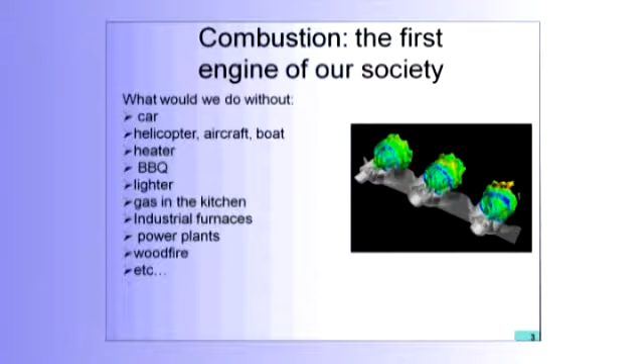So it's really the first engine in our society. If you would suppress combustion, there's a small list of things you would have to live without, and you can see it would be very difficult to live. Actually, the whole society would collapse if combustion would stop tomorrow.

Just a few examples. All of you know about satellites, but a satellite is basically first a combustion fact. It's this kind of thing you need to propel satellites up to the place where you need them. Combustion is also not only useful for society, it's also a lot of fun. This is the simplest example of where you can have fun if you are an engineer.

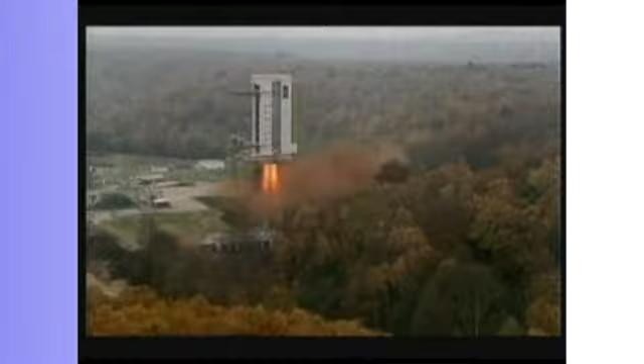These pictures give you an idea of the power which you can find in an engine like this. By the way, those are French engines.

Everywhere here, you find combustion. The rule for such an engine is simple: it has the power of a nuclear power plant in the volume of a car engine. Of course, it doesn't last very long, usually 200 seconds, and that's the end of the story. But still, this is the kind of funny thing you can do when you work on combustion.

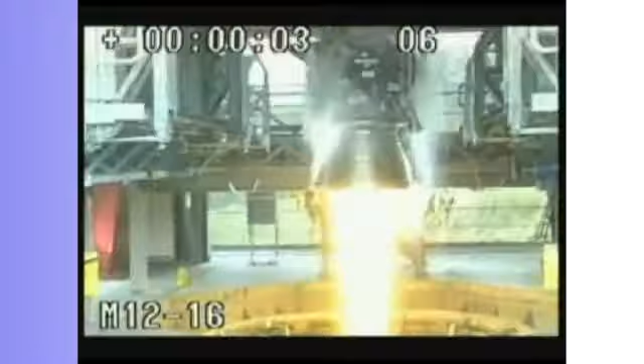Now, combustion, here are other pictures. Those are normal operations, and you can see how important it is to master the process which leads to this kind of power. Sometimes these things get out of control. You will see a picture in a few seconds where things don't burn the way they should.

So now, this is normal, okay? You're going to see something which is not normal in a few seconds. And this one, for example, now this is not what should happen. This explains why everyone is sitting about 200 meters away from the rocket when you start it.

Now, I'm not going to spend a lot of time in this course on military applications, but obviously military, army, everything there is about combustion. Rockets, missiles, bombs, everything here would not exist without combustion. That would be a good thing, but you don't have a choice.

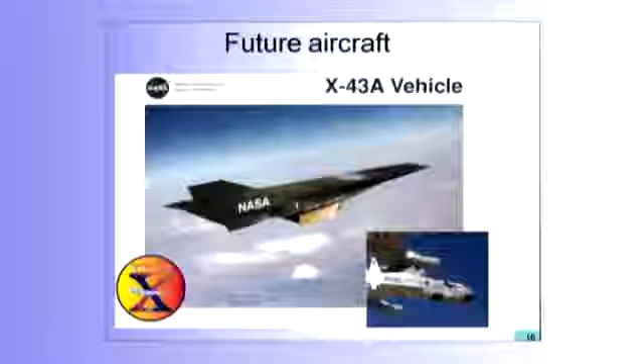So the aircraft of today, the aircraft of tomorrow, and even the famous problem of terrorism you hear about every day now - it's not that it's difficult to make a bomb, but what is difficult is to send it where you want it to go. And that's much more difficult, and again, it's a combustion problem.

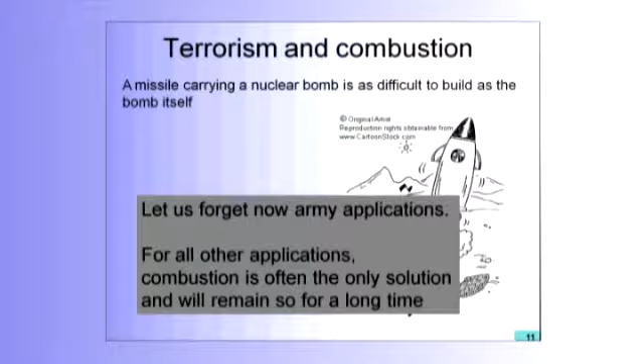So I will forget now about army applications, and come back to your everyday life. I want you to remember two basic equations in this field. The first equation is the following one. There will be equations in this course - today there will be only simple equations, but after that you will see many more.

But the simplest one is that the energy on Earth today is combustion, and I think most of you realize that. What you don't realize is that the energy on Earth tomorrow will also be combustion. It is clear that renewable energies - you hear about wind and sun every day - will replace combustion, but that will take a very, very long time. You will probably be retired by the time this happens. And also, they will not be able to replace combustion for everything.

You cannot propel an aircraft with sun or wind. This will never happen, whatever you do. So for a long, long time, combustion will remain the first energy source, whatever we do.

Just to give you an example, this is the way they produce electricity in the United States today. If you look at natural gas plus coal, it's more than half of the energy obtained by burning something, and renewable energies here are very small, about 4% or something like this. In France, it's a little bit more, more like 10%. So these things will increase, and they will increase fast.

The market for renewable energies grows extremely fast. The problem is that it's very small today, and the global demand for energy grows faster, which means that in the future, not only will renewable energy grow, but combustion will grow too. We'll build more and more power plants using combustion as an energy source. For example, the market for gas turbines keeps growing all the time.

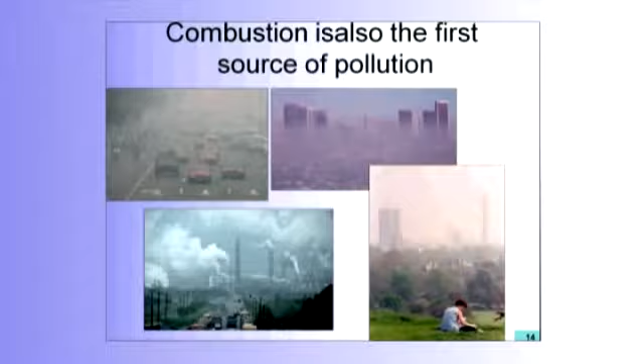Pollution, you heard about that before. This is something we've been working on for a long time in the combustion community, and we cannot live with that. If we keep increasing combustion without limiting pollution, we'll be in bad shape.

An interesting question was, does this change climate? To test that, it's very difficult, and one experiment you'd have to do is stop aircraft for a long time. Of course, you cannot do that except in certain circumstances. For example, after September 11, there was no aircraft in the United States for 3 days, and during these 3 days, they observed - this could be due to random fluctuation, but still - a much larger difference in temperatures between day and night.

So this is a suggestion that when you put all these aircraft in the sky, you modify the clouds, and so you modify the climate.

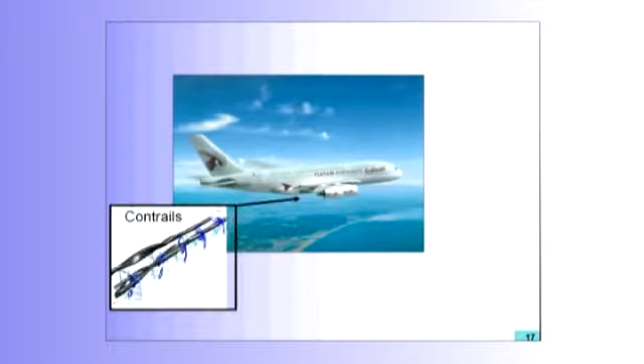So you see, combustion science goes from outside the engine, and also, of course, I'm going to talk a lot about inside the engines, and this is what we need to master. This is what I'm going to try to teach here.

So, pollutants. There are two main types of pollutants. In this course, we're going to burn a lot of hydrocarbons - molecules where you find N carbon and M hydrogen atoms. You burn them with oxygen, and it gives you CO2, water, and a few other things.

These other things are the things that can be avoided. CxHy is a hydrocarbon which you did not burn completely. This is the kind of thing you smell at an airport, for example, kerosene. CO, NO, all these things are due to combustion which is not perfect.

And so those can be avoided, and they should be avoided. CO, for example, would just kill you. If you have too much CO in a room, you're going to die in a short time. So, of course, you must avoid it.

The progress here has been impressive in the last 30 years. 10 years ago, the objective was to diminish those things. Now the objective is different - we also want to diminish CO2 and H2O.

CO2 and H2O - if you burn a hydrocarbon molecule, you will necessarily get N molecules of CO2. You cannot avoid that. So the only way to decrease emissions of CO2 and water now is to maximize efficiency. That means we need to build engines which consume as little hydrocarbon as possible if we want to minimize the impact on climate, because CO2, of course, is the main problem for climate. The progress in the combustion field has been huge in the last 20 years - in the field of piston engines, for example, efficiency has increased by a factor of 2.

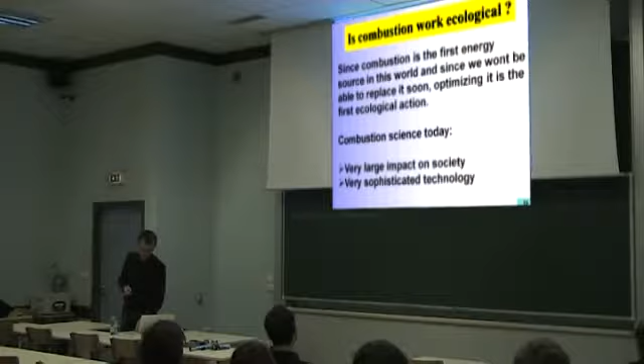Now, I see a lot of people, especially young people like you, wondering if I'm doing combustion work, am I doing something dirty? Actually, it's just the opposite. Today, if you want to do something useful for the planet, you need to work on combustion, because combustion will be here for a long, long time. There's just no way to avoid it.

Well, there is one way to avoid it. You can stop driving, you can stop flying, you can stop heating your house, and you can stop eating also. You can stop a lot of things. If you do that, you don't need combustion. If you want to continue living like you do, there's just no way.

So we need to work on combustion because it has a very strong impact on society, and also because today it's a very sophisticated technology, so we need a lot of engineers. This is why you are here.

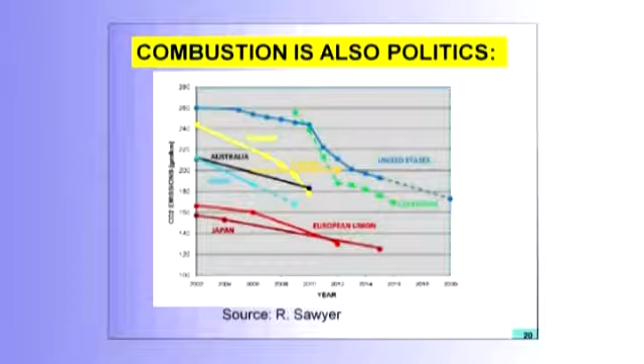Now, combustion is also politics. This is an example here of the years and the regulations giving you the amount of CO2 per kilometer in a typical car. You see that, for example, Japan and European Union are pretty low. You can see that every time you buy a car in France, for example, that you are looking at these numbers and you get taxed if you do something which burns too much fuel. But here you can see, for example, in the United States, that the ratio is almost 2.

So it's not a problem of technology here. It's a problem of politics. You have to decide you want to drive a small car or you want to drive a big car. So you see also where it's not only science - there's also an impact on the politics, which is very strong.

I'm going to say some words, because this is something you hear about on TV almost every day at the moment, about the link between what we burn and the change of climate. This comes from a very good talk given by Professor Sawyer two years ago. Sawyer was basically addressing the question of the link between combustion science, what we do, and climate.

Just to remind you of a few facts, the idea that combustion would change the climate is not new. Fourier, already two centuries ago, said that this was possible, and Arrhenius - you will see Arrhenius many times in the field of combustion - did a very simple computation. He suggested that if you double the CO2, you change the radiation balance between the Earth and the sky, and then you can raise the temperature of the Earth by 5 degrees.

Now, you can do that on one page. If you want to be more precise and take into account the ice, the atmosphere, the ocean, you take about 2,000, 3,000, 4,000 people on Earth. It's called GIEC here, and those are all people building models to predict climate. But the conclusion is always the same: if you release CO2, you increase the temperature of the Earth.

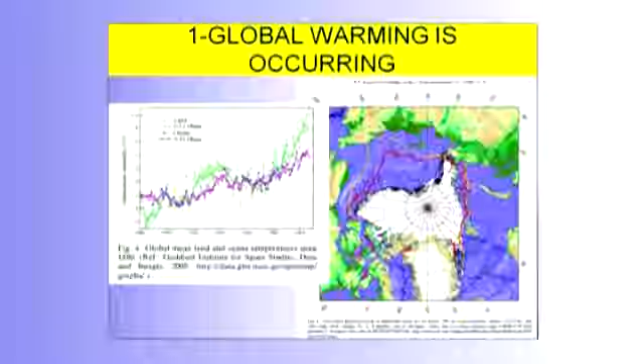And of course, you know that as the temperature of the Earth is going up, the place, for example, where you find ice on the pole is shrinking, and the amount of ice which is left on the pole is going down, and you hear about this problem every day on TV.

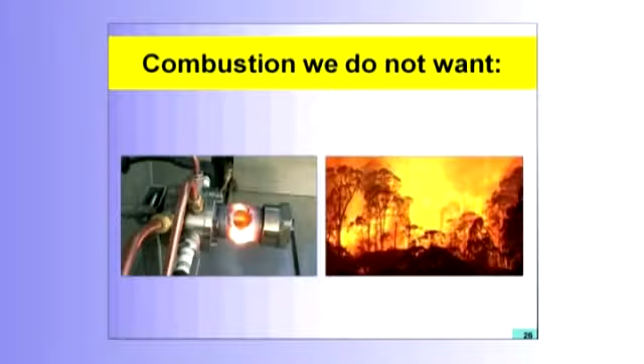Now, combustion has other problems. Even if you don't want to do combustion, you're going to have to fight combustion in many places. If your engine has a problem, here you see a nice hole in a combustor. And also, if you have fires, you have to fight combustion. You need to understand how these things propagate, for example. There's a long list of places where you get into problems with combustion.

This is basically the world of combustion split in two parts: people like me who are trying to get good combustion, and the other people who try to have no combustion. All the people working in that field try to avoid combustion. But of course, you know, it's just not possible.

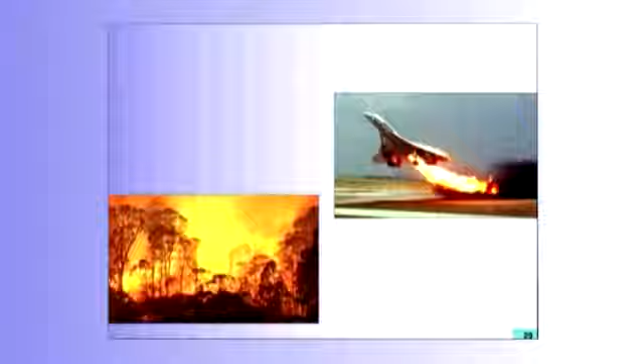For example, if you're flying in this aircraft, suddenly you are very interested in combustion science. You'd like to know what's going on. The French had this rather dramatic problem with combustion, and this is a typical case where combustion science could have helped if it had been included in the design of the aircraft.

An example also of electrical safety, something which is not as well known. If you take a building, or even your house, and you have a gas leak, you can have gas mixed with air, so this can explode. Usually, why does it explode? Well, it explodes because you get an electrical spark somewhere.

For example, in the place where you have all your electrical connections, you have what we call an electrical box. The problem is to design this box so that if there is a gas mixture and you ignite it because of a spark, the flame will stay within the box and will not ignite the whole building. There are lots of people working on that.

So you have many solutions. One is to design a box that is really able to keep the flame inside. If you do that, the box might have a structural problem, because it could explode as the pressure goes up. So what you do is put a small hole so the flame can go out. But only a very limited amount of flame should escape, because if a large flame comes out, you will ignite the whole building and it's lost.

The other solution is to have a box where nothing can come out. Then the flame will start, it will build up, and the problem quite often is that the pressure will rise to a large value and the box itself will explode. So it's a design problem to be in between these two situations, to make sure that if you switch the light on and there's gas, nothing explodes.

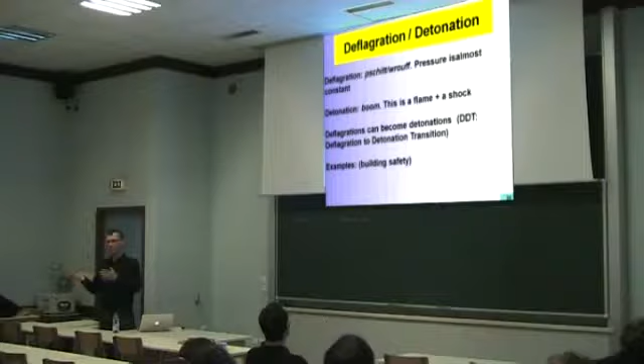The pressure in a flame like this is almost constant—the pressure in the burnt gases and the fresh gases is the same. A detonation is a boom. A detonation is basically a flame plus a shock wave. You've heard about shock waves in the course on aerodynamics. Here, you get a shock plus a flame pushing the shock.

And of course, not very pleasantly, deflagrations can become detonations. I will now show you a few examples that should be simpler to understand.

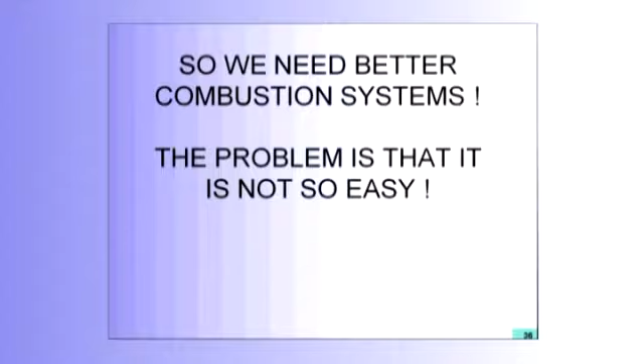You had an example not long ago in the oil industry. You remember, as soon as you get an explosion in a system like this, you get into a lot of problems. So we need better combustion systems, more reliable, more efficient. The problem is that's not so easy to do. First thing is that combustion technology today is already very complicated.

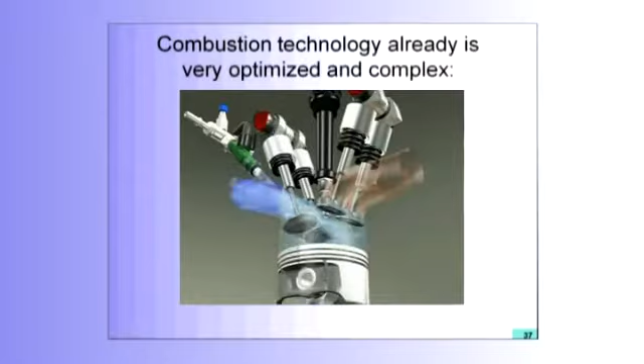I'm just going to show you a few examples here. That's a piston engine, 4-stroke. You get the piston, you get valves here for intake and exhaust. I have brought actually 2 of them, so you can take a look at them. In the old days, all the students were able to work on their own engines. I know today very few of you have ever seen that. So that's a piston, an example of piston engines. I broke them myself.

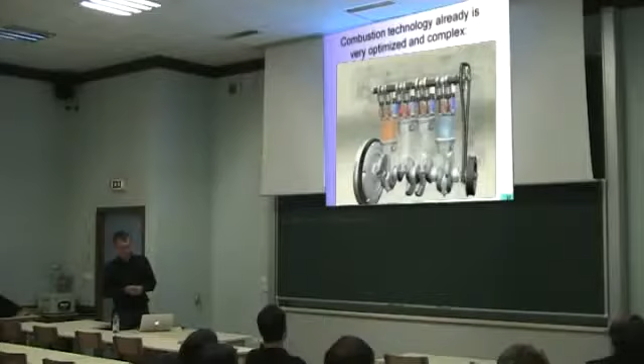So the technology here is extremely complicated. If you start working on a piston engine and you want to improve it, you will find out that many people have worked on that before you, and that's not so easy to do better. Just to give you an idea also of the complexity, this is a 4-cylinder system where you can see the velocity field at the intake and at the exhaust, and you can have an idea of how complicated it is to tune something like this. This used to be like an art, now today it has to become a science to be able to get all the waves. You get a lot of acoustic waves propagating everywhere. So this is a very complicated field. If you have an engine and you want to do better than what is existing, you need to do something really good.

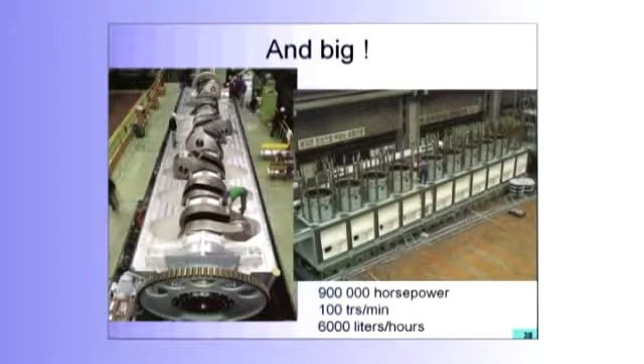Now the problem, of course, also is that even if you are able today to build a better engine, the cost of replacing the existing technology with another technology is very, very large. If you think, for example, of engines like this guy here, this is an engine for a boat. You can see the size of it. With this kind of engine, if you come out with an idea and say I can do better, well, the cost of replacing this engine by another one will be a very large cost.

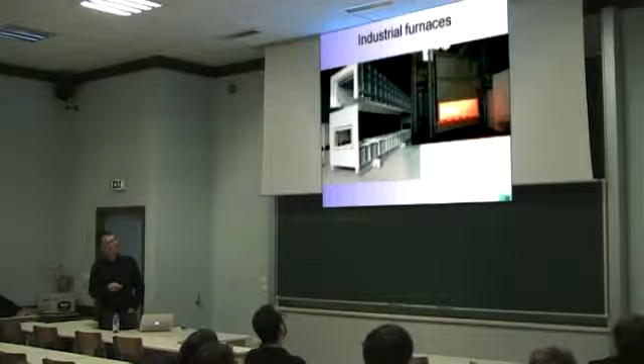Furnaces, you know, we need to heat a lot of things for process, and of course we do that with combustion, with flames, very long flames here. You can have flames 10 meters long, 20 meters long, and optimizing this is extremely difficult again, but the consumption of these things in terms of gas and in terms of pollution is huge. So again, here we have to do something to help.

Gas turbines. Okay, I'm going to talk a lot about gas turbines today because they are very important. Gas turbines, there's just no other way to propel, for example, an aircraft. You cannot use any kind of other energies to do that. So it's very important, and it's also very important for electricity.

Electricity today is produced by many ways, but typically when you talk about renewable energies like wind or sun, there are problems with these systems. There are days where there is no wind or no sun. So what do you do when you install a system producing energy with wind or sun? You need to buy also a gas turbine, because the customers want electricity even if there is no sun or no wind. Especially in summer, which is becoming the first problem quite often, because people use air conditioning. On a very hot day without wind, you will have to be able to do something, and so you will need a gas turbine.

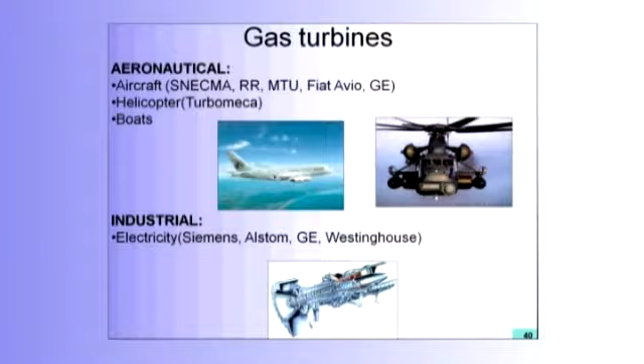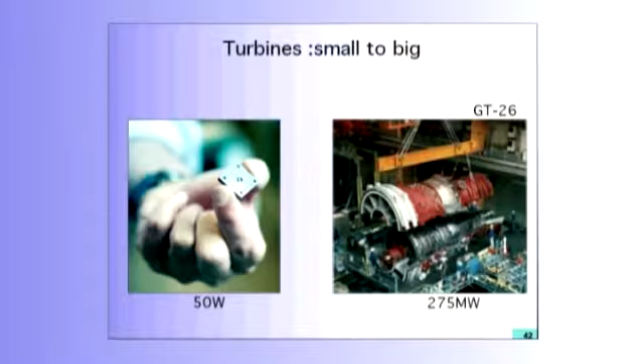Here you get a reasonably big gas turbine, with power of the order of 300 megawatts. If you put 3 of them, you get a nuclear power plant. So it's a very large, very powerful system. At the other end, you have a very small gas turbine, about 50 watts. In between, you get all the range, so you can cover almost everything in this world with a gas turbine.

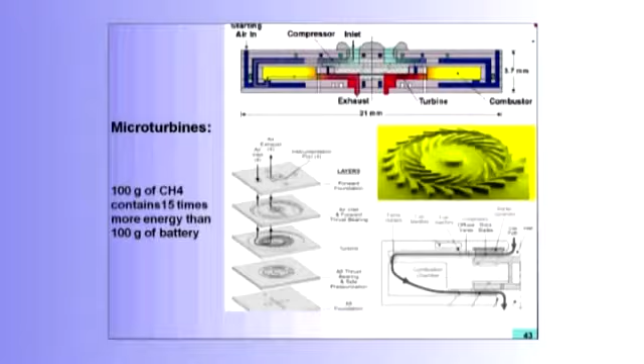Well, basically, and this is a very important statement here, if you burn 100 grams of methane, for example CH4, it will produce much more energy than what you can have with 100 grams of an electric battery, typically 15 times. The first wonder of combustion is that with a limited amount, a limited weight, you can have a huge amount of energy. So what is the application here?

Well, like always, like often, it's a military problem. You know that if you want to win a war, you need to be able to have the soldiers on the field for 3 days typically, 4 days, 3 days, well. For the man it's a problem because after 2 days most men like to sleep, but you can play games with that. You know, you can inject them a few things which make them work for an extended amount of time. After that they will die, but you don't care.

The problem is that if they work and they have no weapons, it won't work. What do they need for the weapons? They need electricity, for the GPS, for the radio, for the communication, for the weapon systems. And if they need to carry batteries on their back, it just won't do the job. They will have like a car battery on their back. So the weight is a problem. So the military here are paying to see if instead of giving them battery, they could just give them methane and burn that in a very small system which they could carry on their back, for example.

And this would be, as you've seen, big like this. If this works for the military, then it will work for you on your cell phones. Instead of having batteries, you will have things like this. And instead of having to plug your cell phone every 2 or 3 days, you could just go to the shop every 1 or 2 months just to add methane into your cell phone. So this is another field of application of combustion.

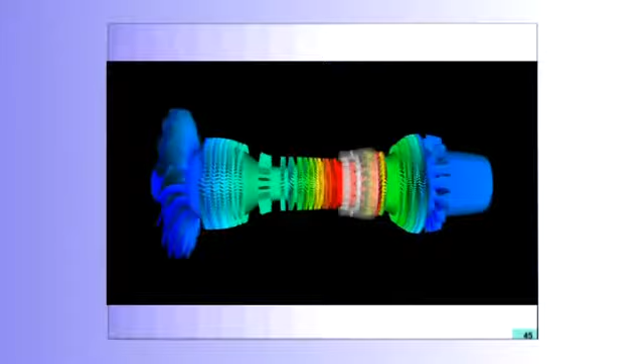An idea of how people are working today on computing those things. This is an example taken from Stanford where they compute a complete gas turbine with the compressor here, the combustion chamber, and the turbine here. The progress in the simulation field in the last 5 to 10 years has been so large that we start being able to do these computations. So you can see here a result of the computation.

To do that, you need a lot of processors. It's not something you do on your PC. You need a room filled with PCs, typically 10,000, 100,000, or soon 1 million processors working together to do this computation. Many of the students doing theses, for example in the field of combustion, will actually do computations very similar to this one.

These things here are called injectors or swirlers. I have brought one of them for you so you can take a look at it. A swirler is a system which is there to mix the air and the fuel. You will see in this course, basically combustion, to do combustion you need to mix these two things, the air and the fuel. It's like cooking, you know, if you don't mix those things it won't work. And you need to mix them fast. So this system, as you will see, is extremely complicated. The reason it's complicated is because you need to mix things very rapidly, and you need to avoid a lot of problems I will mention in a few minutes. So this is also an expensive piece of hardware. Don't break it.

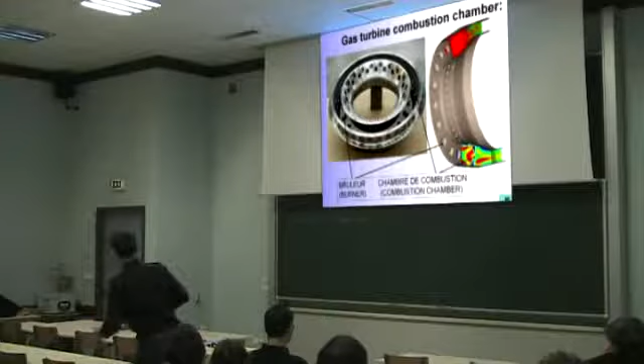So you have one here. In a system like this, you will have between 15 and 24 located everywhere here. The air will come from this side, mix with the kerosene here, and burn in the chamber here and go to the turbine.

Now, this thing you have in your hand, when it's burning, and you look at the flame here, this is what it would look like. It's like a lighter, except it's a much brighter flame. Here the gases are cold - this is cold air. And here you get very hot gases. Typically in combustion, you will go to 2,000 to 2,500 Kelvin. Those are the typical temperature range you will have in an engine.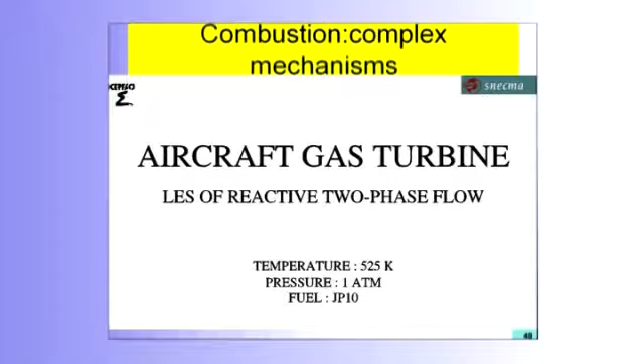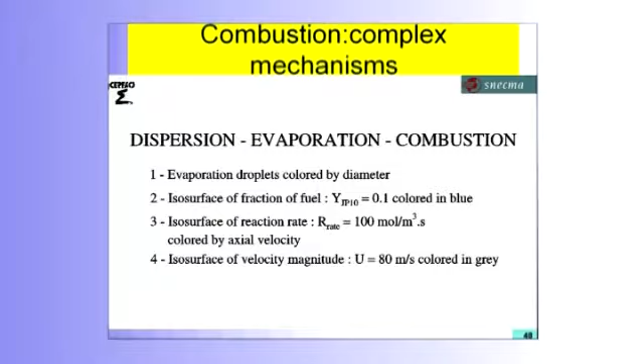So this is not the only thing you need to do in a gas turbine. The problem of gas turbine is that it's not only about doing combustion in this zone here - this is one sector of a gas turbine. You also need to make sure that the walls will survive. If you have a temperature of 2,000 K, there's no way the wall will survive if you don't cool them. So what you need to do is cool the walls here, and inject additional gas so that when the air reaches the turbine, it doesn't burn the turbine.

So you see here, for example, this is what we call dilution air, dilution jets. Those are cold air jets mixed with the burnt gases here so that when you reach the turbine, which is here, you will not burn the turbine. So let me explain that a little bit better.

By the way, I'm going to also give you this one. This is another piece of combustion chamber. This one comes from a helicopter - it's a Turbomeca combustion chamber. You can take a look at its shape. You will see the small holes on the walls, which are very important for cooling. And you recognize the shape, of course. It's only a piece which has been cut - normally you will have the complete chamber.

So for an engineer working in that field, the main question is the following one. I am injecting kerosene here, and here I'm injecting air, and here I have a turbine. The turbine will receive the hot gases directly, and if you don't cool the pieces which are here, you will just kill the turbine - it will just melt away. So it's really a problem of cooling these things.

By the way, I've also taken here a very small piece of turbine. It's what we call a vane. This is the kind of thing which will have to resist the temperature field. And you have an idea here of the size. And of course, it's a problem of what will be the temperature in this system.

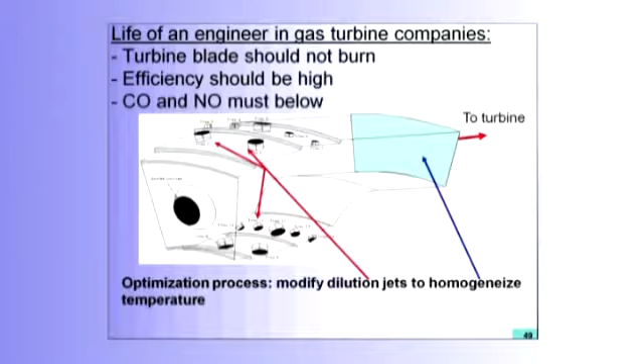So it's a problem of temperature - how do you cool that? Well, as I said, you're going to have to make sure when you add some cold air here that the temperature is low enough so that you don't burn the turbine. As I said, here you get 2500 Kelvin, here you're going to have 1500, and the turbine is just behind it. If you make a mistake, you burn the turbine right away - it's the end of the engine. And if you're flying in this engine, it's also a problem for you.

Now, this is a picture of a helicopter engine. Helicopter engines are quite complicated because they need to be small. So the air here is entering through that side, coming here. Here you mix it with kerosene, it burns. What you see here is the temperature field. The chamber makes a turn here, and here you don't see it really well - this is the first part of the high pressure stator. This is where the turbine is sitting.

So here, if you are sitting here, you receive all these hot gases, and the question is, how are you going to survive that? Well, it's not easy. This is the same thing you have in your hands, receiving all the hot gases here. It's a problem here to make sure that you get cool enough so that you can survive these hot gases arriving here.

When you talk about combustion science for gas turbines, our first problem is making sure you don't burn the combustion chamber. Of course, if you burn the combustion chamber, that's the end of the chamber, the end of the story. At the same time, we need to minimize pollution because you cannot sell your gas turbine. And we want to maximize efficiency and minimize fuel consumption. So the optimization of this system has been here for a long time.

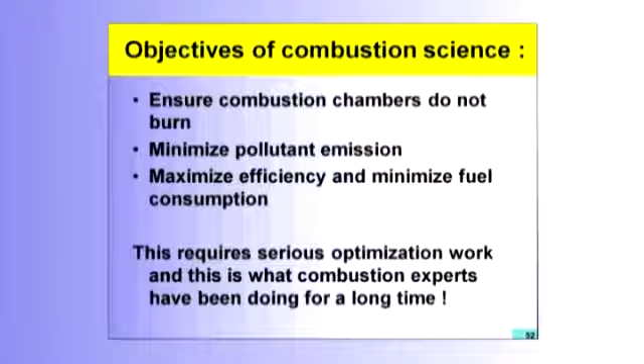It's very important to say that if you look at an aircraft today, or even at a car, they all look the same. The shape of an aircraft is not something you can really optimize much more—they all look the same because they all found the same optimum. But if you look at a combustion chamber, they are all different. Take a French chamber, a German chamber, an American chamber—all of them are completely different. This is a strong suggestion that no one has really found the optimum way to build a combustion chamber.

They are all different. So one of the reasons for the problems here is that when we optimize combustors, we don't always get what we expected. I must say quite often we run into problems.

This is an example, an old movie from NASA, taken at 2000 frames per second, so it goes much faster than what you see here. You have a mixture of air and gas, and here you have what we call a backward-facing step. And here you have combustion. You can see structures here. This is cold, and this is hot, typically 2000 Kelvin.

If you take a chamber like this and start optimizing it, you change things. One of the things you can change is, for example, the amount of fuel, or the amount of air, or the pressure, or the temperature. Quite often what you obtain is this kind of reaction—that means the flame doesn't do exactly what you expected.

In this case, instead of staying where the flame should be, it goes away, it goes upstream here, and we get what we call a flashback. That means the flame, instead of burning quietly here, oscillates.

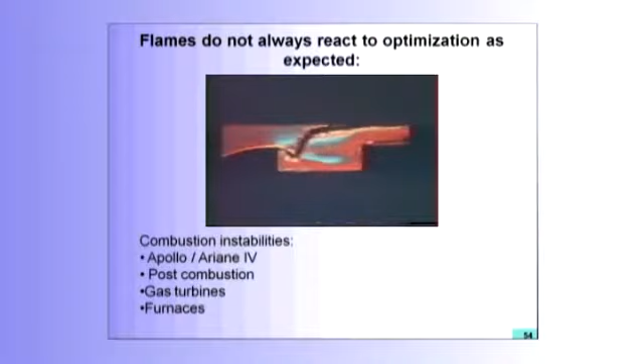This is another geometry, but you will see the result is the same—we have what we call a combustion instability. And very often when we optimize a flame, after a few tests, we get a system which is optimized but which gets unstable. And if it's unstable, you cannot use it. The examples of combustion instabilities are everywhere in the recent life of combustion, and they are a major problem for development of many combustion systems.

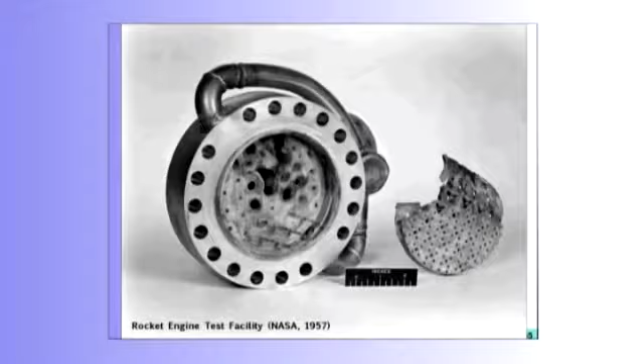If a flame is unstable, for example, if a flame goes to places where it shouldn't go, then the engine dies. This is an example from the famous rocket engine programs in the United States, the ones they used to go to the moon. You can see here, this is not the design—this is what happened after combustion instability. You can see the melted part of the chamber.

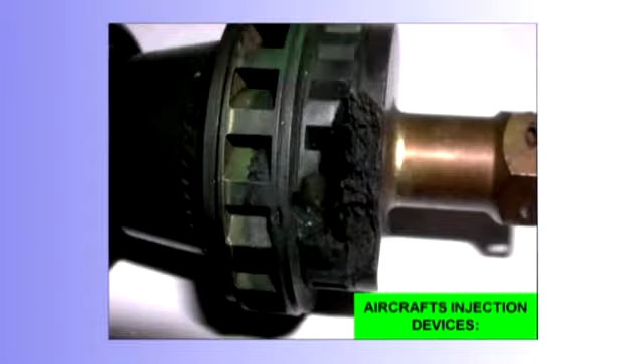Now, the other thing which is not good about this story is that even if you don't burn things, you vibrate the system. Combustion instabilities lead to oscillations of everything. When things start oscillating in a gas turbine, it's not good news. For example, in the compressor and the turbine, everything is adjusted in a very tight way. If things start vibrating, you can have a vane touching the casing, and then the whole engine will explode, and you will lose pieces, like this one here.

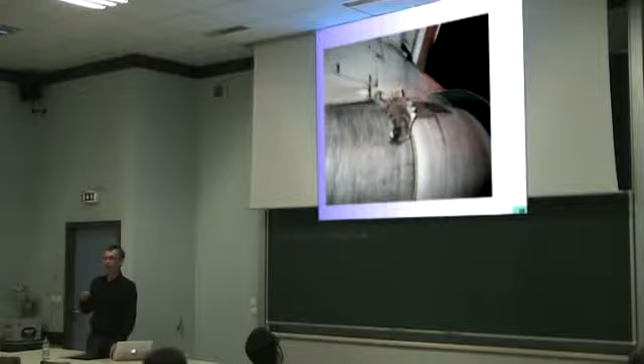This is a piece of an engine. This is the second engine in an aircraft which exploded, and this piece came through the aircraft and hit the other engine. So this is an example where the pilot lost one engine, and right away he lost the other one. How did it do that? Well, this piece of engine went through the plane and hit the other side. So that's no good, of course.

Now, vibrations are something you want to avoid. This is another example of bad vibrations. As soon as you get something which can create oscillations, you can go into problems. In this case, obviously, they have a problem of unsteadiness, something which is vibrating too much. And after a while, if things vibrate too much, you get into problems. I think the pilots were probably complaining about it.

Now, if you do that in a lab, and try to create the same problem in the laboratory, this is what you do. You take a combustor and add walls here so you can look at them. This is a picture taken at DLR in Germany. And if this flame starts getting unstable, this is what you observe.

Not good. Okay, when you start having these kind of problems, you have to work on it. The nice thing is that in the last few years, maybe 5 years now, we started being able to compute these things and predict them. Because up to a recent time, basically, we could not predict combustion instabilities. That means we would build the aircraft, build the helicopter, try it, and if it wasn't stable, then say, okay, how do we fix it? And you see that's a very significant risk for industry if at the last moment you can have a big problem like this one.

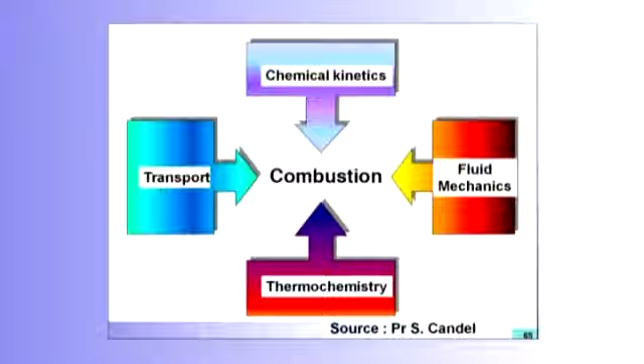So let's talk a little bit about science, because in the end this is going to be the topic of this course. Science of combustion is basically things you already know, not all of them, but many of them. It's a mixture of thermochemistry, thermodynamics, fluid mechanics, of course at ENSEEIHT you all know about this, transport, and chemical kinetics. I'm going to go through these four fields to show you what we're going to be doing in the next sessions.

Okay, thermochemistry. You've done that before, a long time ago. The simplest thermochemical equation is this one: you take, for example, methane, and add oxygen. Usually we get the oxygen in two ways. You can buy the oxygen, you go to Air Liquide, for example, and they're going to sell you pure oxygen, which is very expensive.

There's another place where you can find oxygen: it's just in the air, which is nice. For example, in this room you get oxygen. The problem is you get it also with other gases, mainly nitrogen. So the idea for air is that you get 1 mole of oxygen for 3.76 moles of nitrogen. This is what we're going to use throughout this course. So if you burn this, you're going to find CO2, H2O, and the nitrogen is just sitting here, it doesn't do anything. This is the simplest example of a thermochemical equation.

Now, hydrocarbons, there are many of them. The first one, the simplest one, there is no carbon actually, is hydrogen. Usually we burn it as a gas. Methane, CH4. Propane, C3H8. This is what you find. Methane is what you find in your house. Propane is what you find if you buy bottles. And then you go, of course, to gasoline, which is liquid, which is what you burn in your car. And you go to kerosene, which is what you burn in an aircraft.

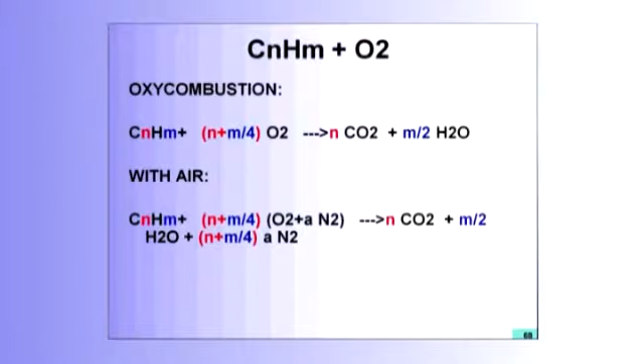Now, classical example of things you need to know for the exam: if you cannot do that, you're going to be in trouble. If you burn in general CnHm plus O2, you can find the coefficients here. You start with the carbon, so it's n CO2, you continue with hydrogen, and then you finish with O2. You've done this before. If you have air, you just add N2 here, and the nitrogen remains on both sides, it doesn't play a role for the moment. So this was the simplest chemistry, the one you've done before.

Now in practice, when I wrote this equation, I assumed that I could find 1 mole of CH4 for 2 moles of oxygen. But there is no reason for that. It would be very lucky in practice if every time you find 1 mole of methane, you can find 2 moles of oxygen. In many cases, what you have is F moles of methane and 2 moles of oxygen, and F can be anything. F is directly linked to something we will call the equivalence ratio. If F is less than 1, we call it lean combustion. If F is more than 1, we call it rich combustion.

And of course, if you need to work on this equation where you don't have F equal to 1, you get different results. For example, if combustion is lean, you don't have enough methane for everything you need to burn, so there will be oxygen left in the burn gases because you don't have enough methane to burn this oxygen. And it's the other way if F is larger than unity: you have too much CH4, so there will be CH4 left in the burn gases. A general point here is that this is much better than that.

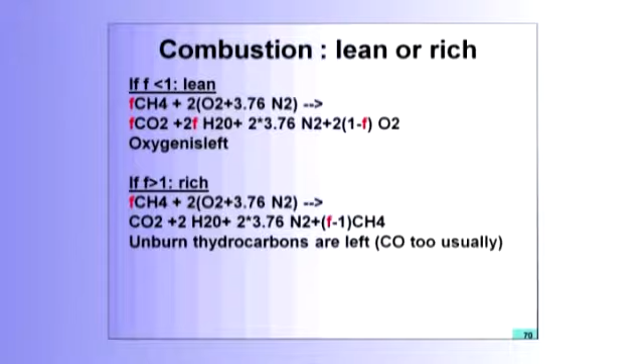Why? Well, here you're wasting your fuel. You have too much fuel, and fuel is expensive, so you don't want to go in this regime. The other problem is that when you get rich combustion, you get a lot of dirty things left in the burn gases. You get CH4 here, which goes to other molecules, CXHY, things which are not good for your health. So it's much better to work with lean combustion.

What's happening in real systems? In a gasoline engine, in your car, if you have a classical engine, the value of the equivalence ratio F is 1. It's not because of combustion, it's because of what we need to do to clean the burn gases. It could be less than 1 actually, but it's not today.

So in the new engines called direct injection, there are not that many on the road today, but there are quite a few. For example, the first one was the famous Mitsubishi, probably 5 or 6 years ago now. In those engines, you can decrease the equivalence ratio to 0.4, so you can save a lot of fuel.

In a gas turbine, you can go to 0.3 to 1, typically for the equivalence ratio. In a Formula 1 engine, the equivalence ratio is 1.2. Of course, you don't care in a Formula 1 engine about consumption. These engines burn about 100 liters per 100 kilometers, so it's not very efficient. But there is a reason for that, and we will see that in the next courses: this is the place where the efficiency is the largest, the flame speed is the largest.

Same thing for motorcycle engines, except you cannot buy them anymore, but a few years ago you could still have motorcycle engines which were running rich. So basically it costs you a lot of money. You need to put more fuel to have the same power.

Now, when I've written an equation like this, there is something I did not discuss. I said, I have these things, I ignite them, then burn, and I got these things. And I never cared about the speed at which this reaction takes place. And this is an important question. Why is it important? Well, because if this speed is too low, it will never happen.

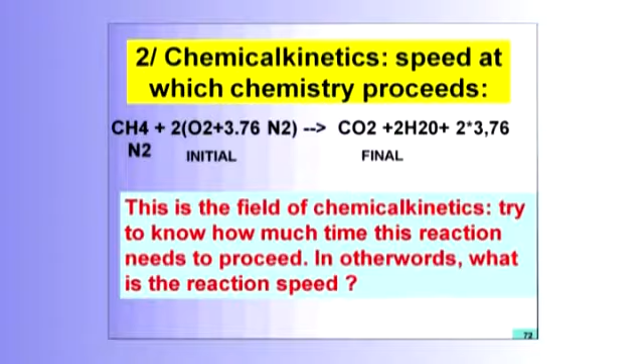And this is the field of what we call chemical kinetics. Chemical kinetics—I'm not going to go into details here because it's a complete science in itself—its objective is to tell you how much time you need to go from here to there. It seems like a simple question at first, but if you think it's a simple question, you're going to be in trouble later, because if you want to understand how these things happen, you need to go into many more details. So let me just take the simplest of all, which is hydrogen.

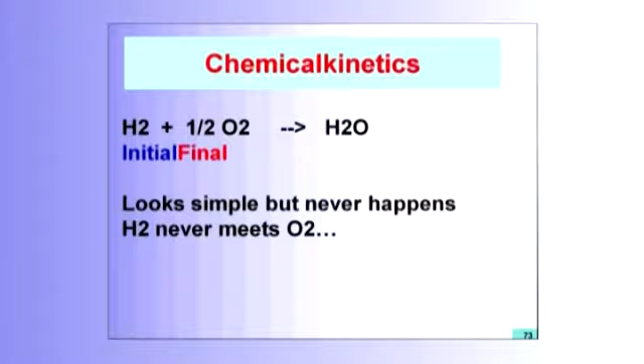The reaction of combustion of hydrogen is simple: you take hydrogen plus oxygen gives water. Nothing simpler than that. In practice, these things never happen. In this world, if you mix and burn hydrogen and oxygen, you will never have this reaction. Never happens. What's happening is much more complicated than that. And this is the field of chemists.

The chemists tell you, if you want to talk about hydrogen-oxygen chemistry, you need to realize you need to care about elements here: hydrogen, oxygen, and nitrogen. And you have not only species which are hydrogen and oxygen and water, but you have to care also about all these other species. And if you want to talk about reactions, those are the reactions you need to take into account. So you see, for example, H2 plus O2, when they meet, they will not produce water—they will produce OH, 2 molecules of OH.

This OH, when it meets H2, will do H2O plus H, etc. You need to care for all these reactions at the same time if you want to predict how the global reaction takes place. Of course, at the end, if you start with 1 mole of hydrogen and half a mole of oxygen, you will end up with 1 mole of water. But in between, all these intermediate species will have been formed and will have disappeared. And to predict the speed at which this happens, you need to care about all of that. If you don't, it won't work.

The first person who realized that and set up standards to predict these things was Arrhenius again. This file here is actually something we call the Chemkin standard. In this world, there was a nice effort in the combustion community about 30 years ago where people tried to organize all these schemes in the same way, so we could capitalize on all the knowledge people gather. So here, this is the simplest scheme for hydrogen.

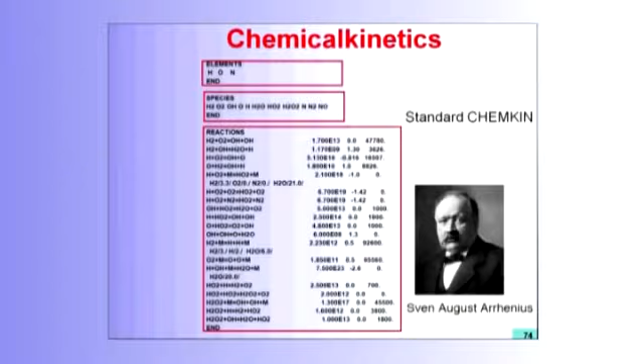You get 9 species and maybe 19 reactions. If you talk about gasoline, for example, instead of 9 species you're going to have about 300, and instead of 19 reactions, 3,000 to 5,000. Now things get complicated. If you just want to solve the equations to understand those things, it's going to take quite a while. This is a big part of combustion science, though not the part I work on. It's a painful part because when you have 4,000 reactions, if one of them is wrong, nothing's going to work. So it's an important job.

Why is it difficult? Because flames are fronts, basically. If you look at a lighter, or at the flame I've just shown you, there's a place where you have the initial gases, for example methane and oxygen, and on the other side you get the burnt gases. In between, you have the place called the flame, which is a flame front, so it's very thin — the thickness is typically less than 0.1 millimeter. In this zone, everything happens.

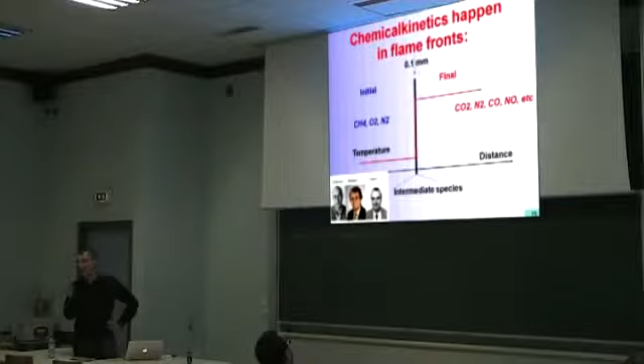So everything I've shown you, all these reactions, will take place in a very, very small zone. If you want to understand what's going on, if you want to measure or compute anything, you need to be able to compute things which are extremely thin, where all the reactions happen extremely fast. And that's a pain.

Just to make things clear, I've talked about thermochemistry and chemical kinetics. I want to clarify the difference between the two again. Thermochemistry deals with the initial and final states, and it's totally independent of the speed at which one goes from the initial to the final state. It's basically like taking the train from Paris to Toulouse — it just says you're on the track from Paris to Toulouse. It doesn't tell you if you're going to get there in 1 hour or 1 year. That's not the field of thermochemistry. It tells you that if you keep going on that track, eventually you will reach that stage.

If you want to know more about the speed, you need to go to chemical kinetics — we'll come back to that in the next sessions, but on the website you can find more information and more examples. Chemical kinetics is the science that tells you how fast you go from one state to another. You're going from Paris to Toulouse, and you're going with the TGV — though not everywhere. So it's going to take you 5 hours to do it. To know that, you need much more information: not just the track, but which train, the speed of the train, etc. So chemical kinetics is a little bit more complicated than thermochemistry.

Let's talk a little bit about what we're burning now. I'm sure everyone in this room has followed a course on aerodynamics — you've studied the Navier-Stokes equations, and probably looked at pressure losses in tubes and flow around wings, etc. When you were doing that, implicitly, no one told you, but you were using a simplified set of equations. In this course, I'm going to show you the full set of equations. You were basically studying only air — all the gas flowing for you was air.

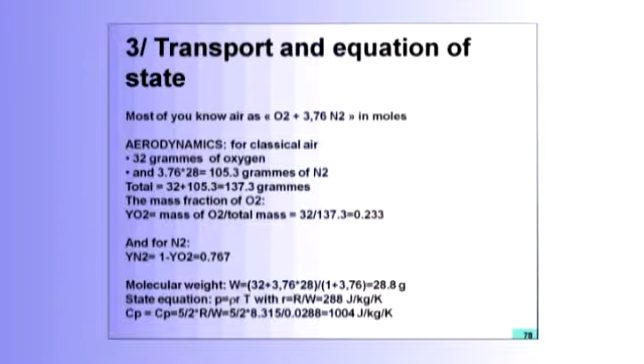Now, the molecular weight of air is not 137, like I see that almost every year at the final exam. It's this number divided by 4.76, because you need to know the weight of 1 mole. So it's the famous 28.8, sometimes you take 29 grams per mole. And in the state equation, P equals ρRT, R is equal to 288 joules per kilogram in Kelvin. And the CP of this gas is also of the order of 1,000 joules per kilogram in Kelvin. So this is what's been used in all the books and all the courses you have taken up to now.

The problem is, in combustion, it's more complicated now because it's not only air we have. The air will change. Instead of oxygen, we're going to produce CO2. So we need to take into account the fact that we're going to burn things. Instead of these things, we're going to have a mixture with all these gases, as I said, between 100 to 3,000 species maybe. And so that makes our life more complicated now. We cannot only solve for velocity and pressure and all these things like you did before. We need to solve for what we call the composition.

So what is the composition? Well, the composition is the equation which gives you the mass fractions of all the components in a gas. So what is the mass fraction? It's if I take this room, I measure how much mass of the species k I have, I divide it by the mass of everything in this room, and I get the mass fraction. As I said, the mass fraction of oxygen today in this room must be of the order of 23%. Now the problem is that I need this Yk here for all the species in my gas. So if I have 3,000 species, I need 3,000 mass fractions. That means I will need to solve for 3,000 more equations.

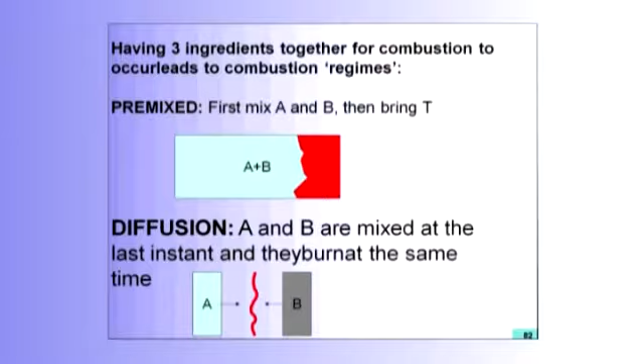So the other solution is to do what we call diffusion flames, or non-premixed flames, in which case you keep the A and the B separately. You don't mix them. This is what you do, for example, in a rocket engine: you get one place where you store the oxygen, one place where you store the hydrogen, and you mix them at the last instant. You don't mix them before. That would be just suicide.

The funny thing about diffusion flames - I will show that in 3 or 4 courses - is that it's surprising that you can mix them at the same time and they will still burn. They will mix and burn at the same time. The problem is that this is not very efficient. It's safe, but it's not very efficient.

And this is where fluid mechanics comes into our story. Fluid mechanics is what determines how you mix things. If you mix them before, or if you mix them at the last moment, this is done by the way you have organized the flow.

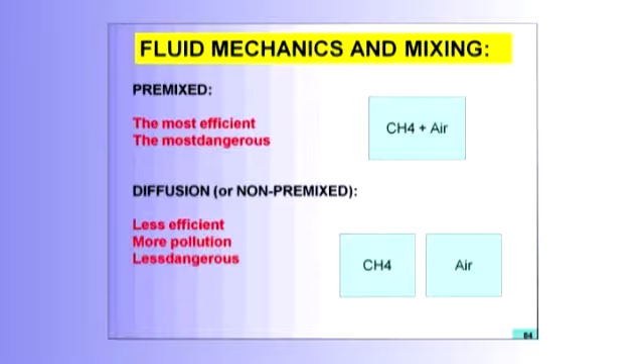So to summarize this business about regimes of combustion, you have these two classical regimes. The first one is the premixed, which is the most efficient, the least pollutant, but the most dangerous - it's called the bomb also, if you have this kind of system. The diffusion, or non-premixed, is less efficient, more pollutant, I will show you why, but much less dangerous.

And the problem in industry is that we don't want to carry a premixed system with us. We don't want an aircraft where you get a tank with premixed gases, and we don't want that in your car either. So we want to have something which is a diffusion mode, but still, if we want to make it efficient, we want to mix it as fast as possible.

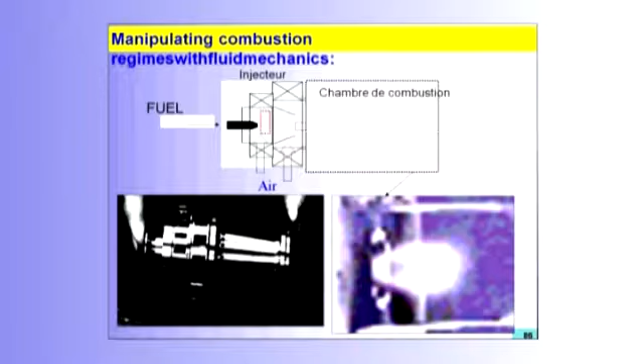The problem is that this was the design people had a few years ago, and in the combustion chamber, things were not really mixed, not mixed enough. It's like cooking again - if things are not mixed, you don't get a good result. So they thought, well, we should add an additional tube here.

The role of this tube is that the air and the fuel should mix here before they burn. If we do that, we will have something which is more premixed here than here, and so we'll have a better flame. This is the idea of these systems, which have been generalized under the name LPP, and I think most gas turbine companies have a system like this today: here you would have injection, here mixing, and here combustion.

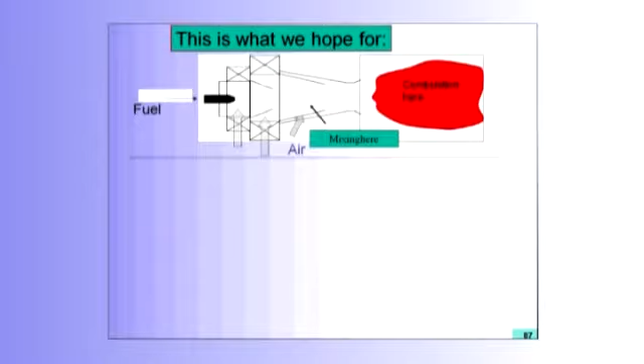Like always, flames don't always do what you expect them to do, because if you start having a zone where you have air and fuel mixed, what can happen is this: you can have what we call flashback. The flame, instead of staying here, will see that there is a way to propagate, and so the flame will come back and come into this system. And again, if this happens, this is the end of the system.

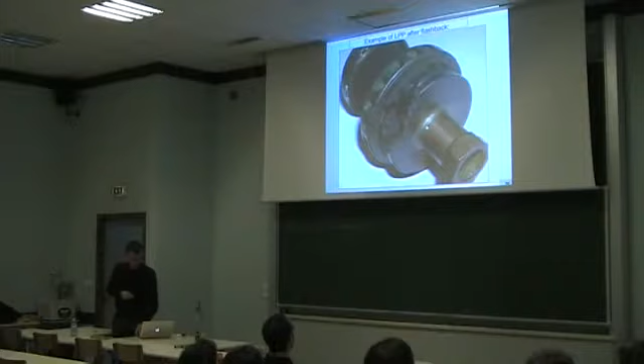Just an example of a very old LES we did here in a PhD maybe 10 years ago. This is a cut here, the axis of symmetry of the system I've shown you. Here we're injecting fuel, here we're injecting air. You can see the cold gases here and the burnt gases here.

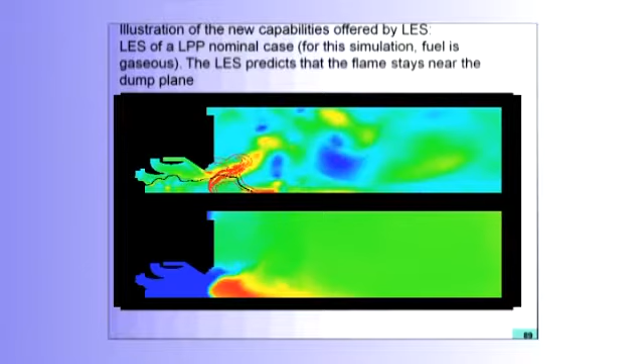This is what we call a stable regime, where the flame will stay there. That means it's exactly the place where we want it to be. We have mixing here in this tube, from here to there, and the combustion, as you can see, stays exactly where we expect it to be. So this is a nominal regime.

The problem with a system like this is that if you change a little bit the regime, you decrease the power, for example, what can happen is this problem. Now you will see that we are decreasing the flow rates here, and the flame, instead of staying here, will have a bad idea of flashback and coming to this point. Now this is the end of the story here. You can see that a system like this cannot be used in a real engine—it would be too dangerous. The system is too sensitive to a small change.

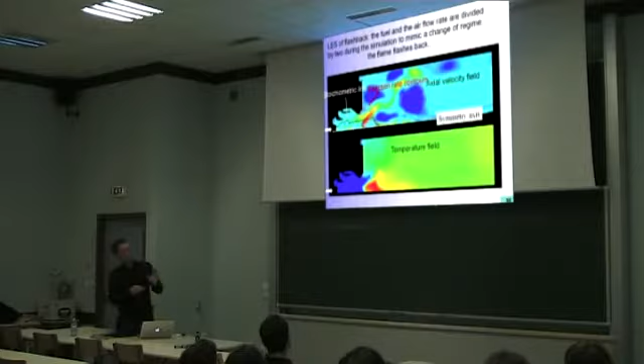So this is an example of where, again, we try to use the fluid mechanics to get a premixed flame here, but then we can have other problems. And again, we come back to what I mentioned before: combustion instabilities are always very close to our problem.

Same example here in a burner coming from Alstom. Alstom had designed a very complex burner a few years ago. Some of you probably are too young to remember that, but Alstom almost went bankrupt—when was that, 6 years, 8 years ago. It may have been Sarkozy at that time who worked on that. In the end, what happened is that all your parents and me paid for Alstom with our taxes to be able to avoid that this company goes bankrupt. Today it's doing very well.

But at that time they had a problem with this burner. The problem with the gas turbine is that if you sell a gas turbine to a customer and the gas turbine is not working, making noise or vibrating, the customer stops it, and then you have to pay for the money which is lost by your customer. This is a lot of money—typically 50,000 euros a day. So if you have 100 gas turbines in this world and they don't work for 100 days, you can multiply 50,000 by 100 by 100. You see right away that you're going to go bankrupt very fast.

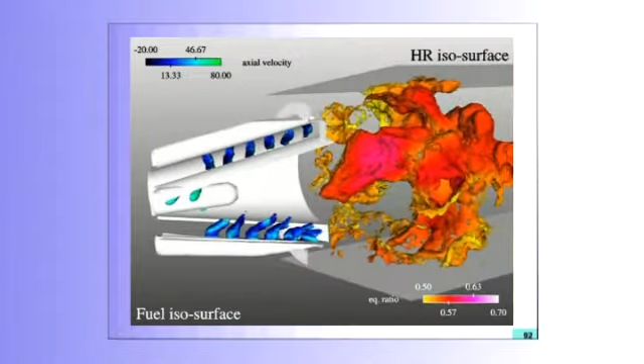The way it works is that the system is staged. You're injecting air here, and the methane is injected here—these are all small methane jets. You have many jets to try to mix things rapidly. Again, the objective is to mix things as fast as possible. So here you get the mixing tube, basically, where you mix the air and the fuel, and here you get the combustion taking place. This is the reaction rate you see here.

You see here how the system works when it works the way it should: you have injection, mixing, and combustion. This is the nominal regime, and this is the way it works actually today—now they have fixed the problem. But in certain cases, you could have what I'm going to show you now: instead of working that way, you would have this regime.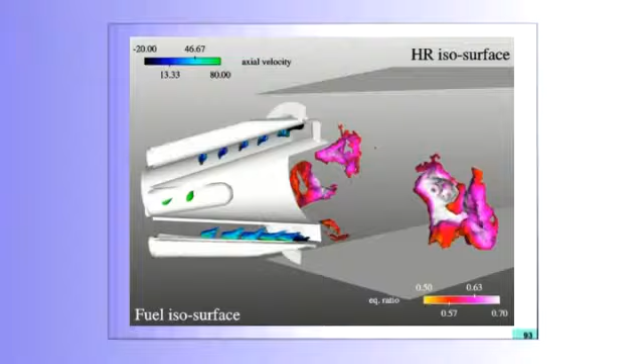It's another solution of the same Navier-Stokes equation, except here you get a coupling with acoustics. In this fluid mechanics problem where we try to optimize for combustion, we get into a problem of combustion instabilities. What's happening is basically the acoustics get into the picture, and you have injection, then combustion, then injection and combustion again, and the whole system pulsates.

These pulsations are not always a problem. One of the famous systems where pulsating combustion was done on purpose was the V1 during the Second World War. They designed an engine meant to work in a pulsated mode. But if you don't want it or plan on it, it's a problem if your system isn't designed to resist it. That was the issue, and it was fixed, though it's not always that you can fix it easily—it just costs money.

Okay, I want to say something about turbulence now. You know what turbulence is. The problem is that turbulence also appears in combustion. This is a very old movie, probably 30 years ago.

We did that a long time ago, and our problem was the following: we have a flame here, fresh gases, burnt gases, and we're just sending turbulence into this flame. The first thing that happens when you send turbulence—this is vorticity here—into a flame is that the flame gets wrinkled. It does not remain flat. The flame starts having all these funny shapes you can see here, and it gets longer and burns more. You see right away that it gets very complicated.

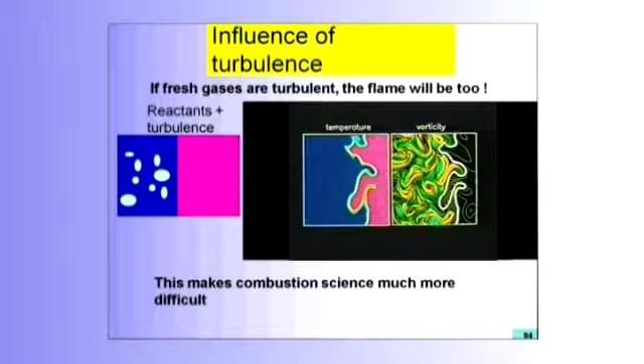Turbulent flows, which you've probably studied at school already, are complicated. But when you add a turbulent flow with flames, things get really tough. When I saw that at your age, I went to my teacher, a professor, and told him I'd like to do laminar flames because turbulent flames look too complicated. He told me, it's not a problem—if you want laminar flames, study the lighter and the candle; if you want turbulent flames, study that. So I said, okay, I'll do turbulent flames anyway. There's just no way to make money on laminar flames.

A small number of people study laminar flames, but in practice, the real applications are all turbulent. Why? If you want a lot of power, you need a large flow rate, and if you have a large flow rate, the flow will be turbulent, so the flame will be turbulent. There's just no way out of that. So all practical combustion applications will be turbulent, and as you'll see, turbulence makes things interesting. This is why we get paid, actually.

Of course, combustion gets hot, as I've said before. To give you orders of magnitude: in most flames, the fresh gases have a temperature from 300 to 900 K. Why does it go up? Because usually we don't burn gas right away—we pass it through a compressor first. At the end of the compressor, because of isentropic compression, you're already hot. The density will be of the order of 1 kilogram per cubic meter, and if you're at 1 bar—though in a real engine you'll be at 20 or 40 bar. In a diesel engine, you'll be at more than 100 bar, and in a rocket engine also more than 100 bar.

When these things burn, you get to a second stage with a temperature of the order of 2000 K. The pressure stays the same, but the density will be much less. If you look at the state equation, if you're warm, you are light—this is why on Earth, when you make a fire, the hot gases go up.

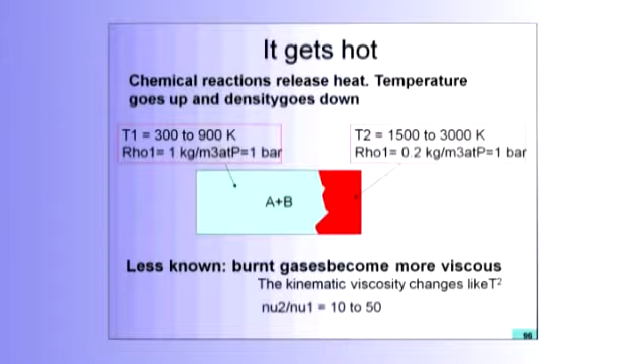The second thing, less known, is that burn gases are very viscous. When you see burn gases going up in a fire, they look like they are not viscous at all, but that's not true. The kinematic viscosity, nu, changes like the temperature to the power 2. So typically, between the viscosity in the burn gases and the viscosity in the fresh gases, you can have a ratio of 10 to 50. That means the Reynolds number in the burn gases will be much less than in the fresh gases, and this has implications for turbulent combustion.

Okay, I've talked a lot about gas combustion. Now, gasoline and kerosene are not gas, they are liquid. So when you put gasoline in your car, you put liquid. How does that burn? Well, you need to atomize it. And this adds a new dimension to the field of combustion.

We have to care about the following problem: how do we inject the gasoline into the engine? You cannot just take the gasoline and put it in your cylinder, it won't work. The important thing is you need to atomize it first, breaking it into small droplets. These droplets go into the chamber, they evaporate, they turn to gas, and once they're gas we're back to the previous problem: we have to burn gas with air. The problem is that atomizing the droplets and vaporizing them is quite complicated.

Most of you here are probably using diesel engines. The main progress in diesel engines in the last 10 years has come from atomization, by increasing the pressure. In a diesel engine, the pressure of the liquid when you inject it can be of the order of 1500 bars, and in the old days it was much less. If you've seen an old diesel car, following it you get this black smoke out of it. This was completely suppressed once they started using these high-pressure atomization systems.

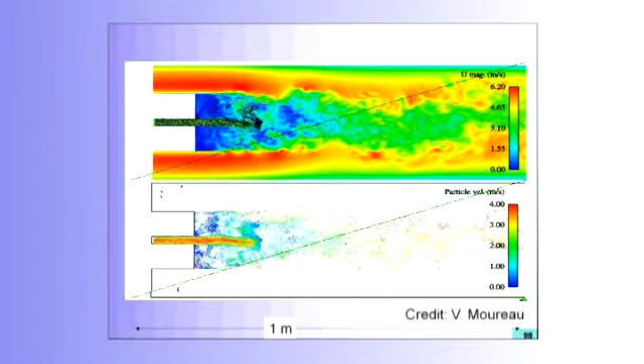This is an example of a simulation by Vincent Moureau a few years ago. He's injecting droplets into a gas with a recirculating zone. The trajectory of the droplets is interesting: they come into the chamber, then go backwards, and then are convected away in this zone. At the same time, they evaporate. So if you need to predict combustion, you also have to care about the droplets. That's a very active field of investigation at the moment.

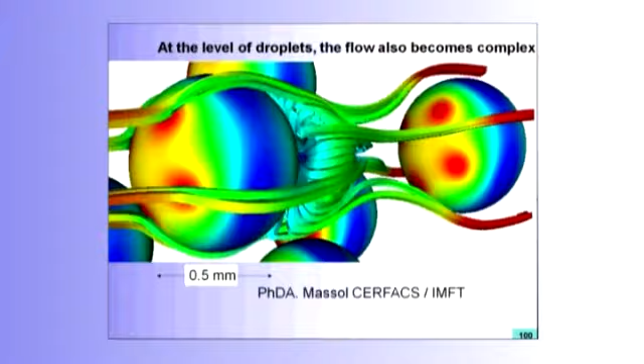Here you get maybe 2 or 3 million droplets in this simulation, and each of these droplets has its own problem. If we want to understand that, we need to care about one droplet itself. This is something else we do: for example, tracking the flow around droplets which are very close together. In certain regions, the droplets are so close together that you need to care about the interaction between them.

This is another aspect of combustion which makes things interesting. I want to talk about ignition. As I've said before, if you have gas and fuel and air, it's not enough for ignition—you need to ignite things if you want it to go. In a gasoline engine, you need to ignite it at each cycle. This is why you have spark plugs.

In a gas turbine, you ignite it only once when you start the turbine. Then you have two ways to do that: you can ignite things by spark, or you can ignite it by auto-ignition.

What is auto-ignition? It's the fact that you don't use a spark, you just compress the flow. If you compress it enough, the temperature goes up, and at some point combustion starts. This is what you do in a diesel engine—there is no spark, just a piston going up, up, up. At some point, the pressure is so large that combustion can start without any spark.

Ignition is a big problem. Most cars today start fine, but 20 years ago, during the winter, you would try to start the car and it just would not start. These problems are fixed, but if you think about aircraft, igniting an aircraft engine is not a big problem.

The problem for an aircraft engine is to reignite it. What do we call reignition? It's a very important part of aircraft engine design. Reignition is when you're flying and suddenly the engines stop—it would be a good idea to restart them in a finite time, shorter than the time it takes to go down. And this happens.

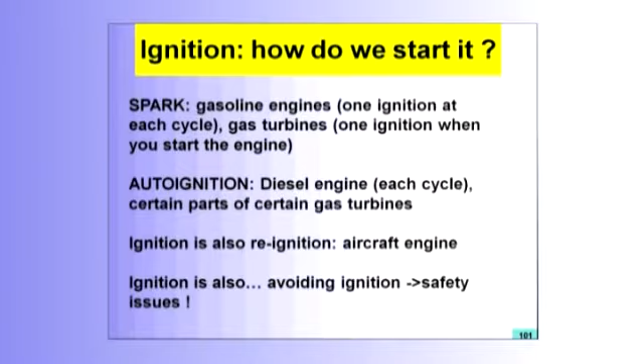Now, ignition isn't only about having ignition—it's also about avoiding ignition. In terms of safety, a major problem quite often is that people are working, for example at ENSEEIHT, redoing the buildings, and suddenly they hit a gas line and get a leak of gas into the air. The problem is: should we ignite it? Shouldn't we ignite it? Where should we be? If there's someone smoking there, is it dangerous or not? So in terms of safety, ignition is also very important.

This is an example of combustion here in the lab. In the laboratory, you have walls here, and you inject air and fuel. I want to show you how these things are ignited in practice. This is the ignited view—you can hear the noise of these things as always. This thing is ignited, it's blue, you see the flames, normal condition.

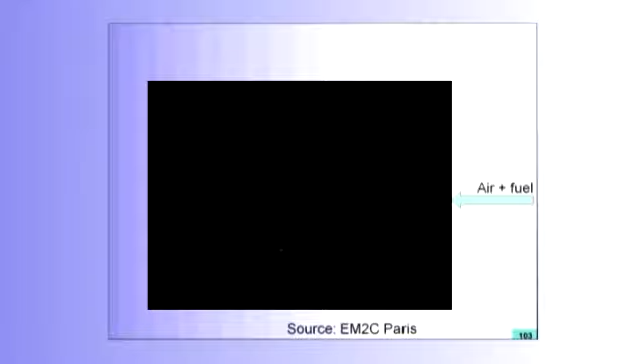How do you ignite that? Well, to ignite it you use a spark—the spark is located here. You have only the air, first spark, second spark, third spark, no ignition... and then it goes. The characteristic of ignition in this system is that it does not happen at the first spark. Usually it takes a few sparks before it really starts going.

Now you don't need to go to an experiment like this—if you want to study that, you can do it at home. A system like this one to prepare your coffee is also an interesting problem, where combustion has to propagate from one side to the other. Even in terms of combustion science, it's not always obvious.

Some of you may have had problems—some mornings these things don't ignite and you don't know why. It's enough, for example, if you have a dirty hole here, that combustion won't be able to jump from here to there, and the whole system doesn't work. It can actually be dangerous if you have an old system, because then you have gas coming out, not burning, and this gas will burn at some point later—you don't always know where.

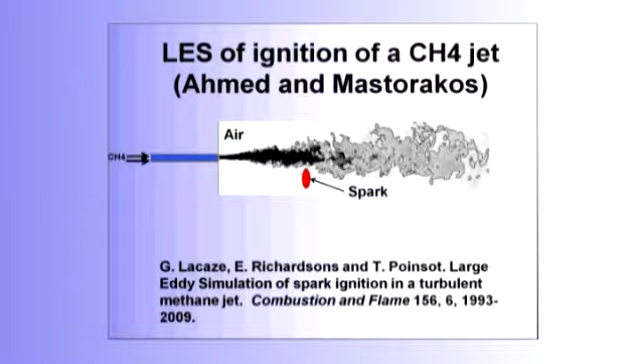So an example of what you can do today, the simplest example of combustion is the following for ignition. You have a jet of methane here into air. It's exactly what would happen if I open this thing here. The question which was raised here and studied experimentally, and which we studied with an LES, a large eddy simulation of this problem, is the following: if I put a spark here, will it ignite or not?

So I will show you three positions where we put the spark: a spark very close to the jet, a spark here, and a spark downstream.

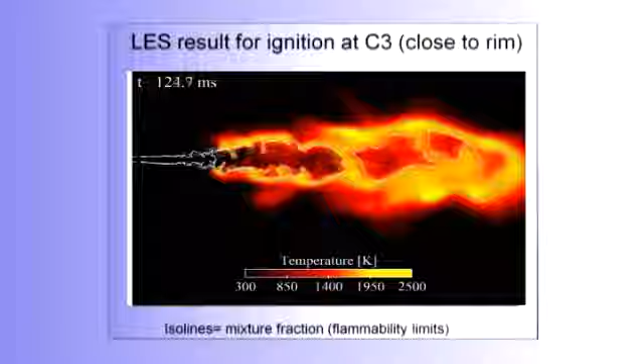This is the case where the spark is very close to the jet. The spark is here, and what you see is the temperature. You can see here that ignition takes place. The flame is not starting here, it is what we call lifted. There is a zone here in which there is no flame, mixing is taking place, I'll come back to that later. Then the flame is stabilized here. So this is an example where you ignite the flame, and it works, you get ignition.

Another example here where we put the spark much more downstream. It's a bit too far downstream, as you will see. Here you get ignition, you see something igniting, but the flow is going too fast. So the flame is igniting, but it's propagating downstream, and eventually it will go away and stop. So in this case, you can have a spark here, but you won't be able to ignite this jet.

The last case corresponds exactly to the point which is the limit. Here you have the experiment, and here the simulation. You will see that the flame is kind of hesitating, thinking, well, maybe I should propagate or not. This is exactly why we are close to the limit. After a while, the flame will propagate and come back to its position here.

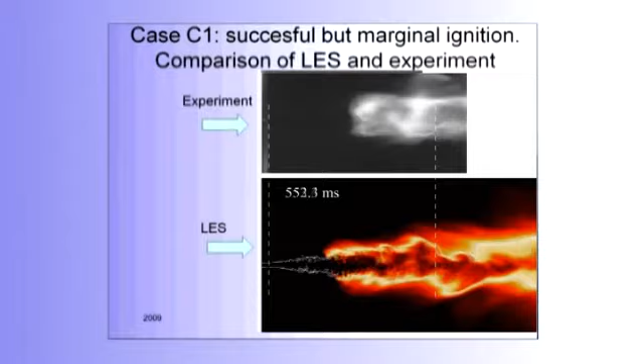Being able to predict this ignition is very important, as I said, for safety, and also to understand the fundamental mechanisms in this system. If you cannot predict here how ignition takes place, you won't be able to do it in what I'm going to show you now, which is a real engine.

So when the thing is ignited, of course, it comes back to the same point as before. The question is, does it ignite or not?

Now I want to talk about helicopter engines a little bit. Helicopter engines are a different story—you don't reignite a helicopter engine. If the engine stops, you fall. That's the general idea. But you have to do something different with a helicopter engine: you have to be able to start your engine on the ground, but also on a mountain. It's a very important aspect of helicopters. For example, for safety, they have to go up on a mountain at 5,000-6,000 meters, and you have to be able to stop the engine and reignite it.

And things get complicated. If you think about going to India and stopping on a mountain at 5,000 meters, if you stop long enough, the engine will be cold, the batteries will be cold, and the fuel will be frozen. And now if you're working for Turbomeca, for example, they ask you, okay, now I want to reignite this thing. Usually it's tough work.

One reason it's difficult is that if the pressure is low, the atomization of the fuel is very bad, and it's very difficult to make sure you're going to be able to ignite one sector and propagate towards the others. You have seen that in a real combustion chamber, we have many sectors, and usually we don't put sparks everywhere. We use igniters at some point, and then we hope that the flame will propagate to the other points.

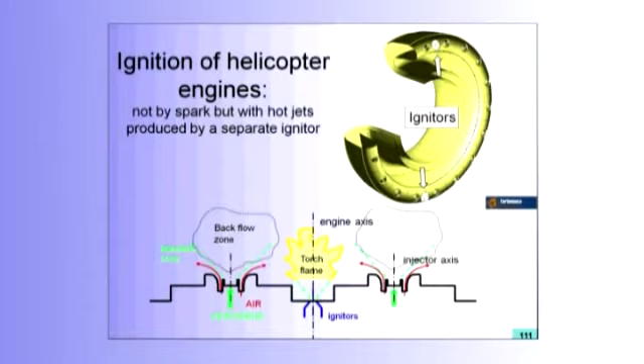I'm going to show you a computation done two years ago on a full chamber, a complete combustion chamber of Turbomeca, where you have all these injectors injecting kerosene and air, and you have one igniter at the top, which is a jet of hot gases, and one igniter at the bottom, another jet of hot gases. And the question is, will this thing ignite or not?

So in this case, it ignites. We picked a case where ignition takes place. The blue zones correspond to high velocity. You have the injection here, the dilution jets, and here the hot igniters, these two. What is yellow is the place where the reaction rate takes place. You see that reaction starts near the place where you inject and starts propagating to the neighboring points.

Let me show you the end of the movie now. Same thing here, you see combustion starting, propagating, jumping from one burner to another. It takes about 20 to 40 milliseconds to do that. This is a case where things happen the way they should. It does not always happen like this, but when you have the simulation, you can understand why things don't propagate or do propagate.

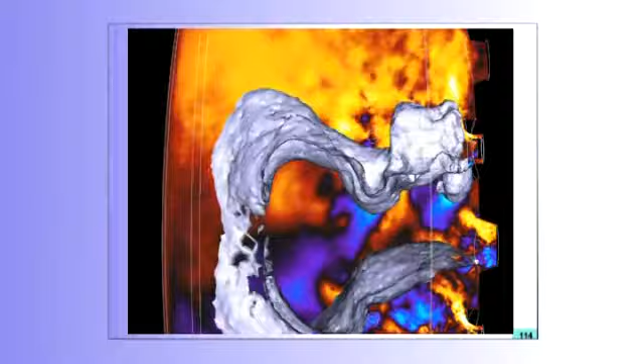This is the same thing now. We're trying to understand how the hot zones propagate from one burner to another. We're going to travel with that. You have here the hot zone, an isosurface of temperature, and we're going to follow it. Now you see this part is hot, this is cold, and we're traveling with the flame, and you see the flame jumping from one injector to another, and finally it will meet the other flame which is turning in the other direction.

Really, combustion, as I said, can be interesting. As you can see here, you get a nice mixture of transport, turbulence, chemistry, everything at the same time.

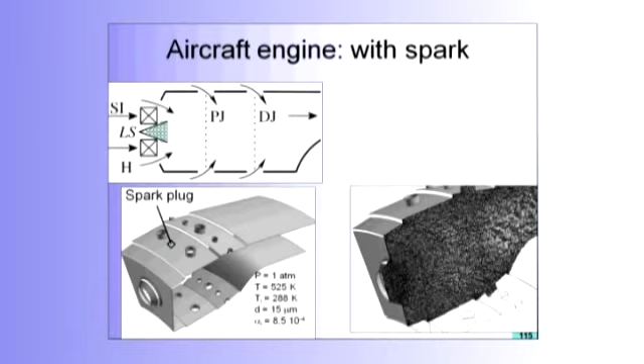An aircraft engine, this one coming from SNECMA. Same problem, we need to ignite it. Here, as you can see, the design is completely different. You get injection of kerosene here, dilution jet, and the spark plug is located here. When you try to ignite this thing, this is what happens.

You get the first spark and nothing happens. Then you will see there will be a second spark, and this one will be able to produce combustion. After a while, the flame will get stabilized. Again, this is what we study for reignition. So you get two examples here.